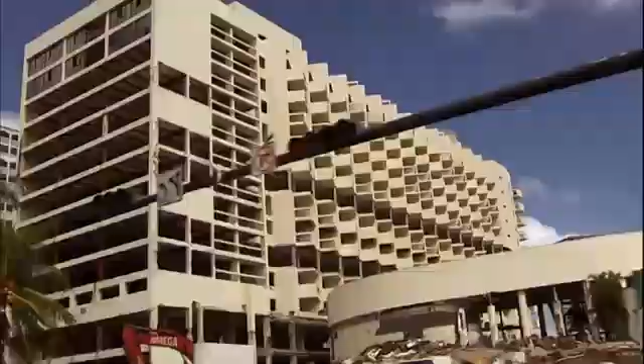One of America's first luxury resorts must come down. Two massive towers wedged into a densely occupied and high-priced neighborhood. An exhausted team. A hazardous site. We gotta stay sharp. It's just an inherently dangerous place.

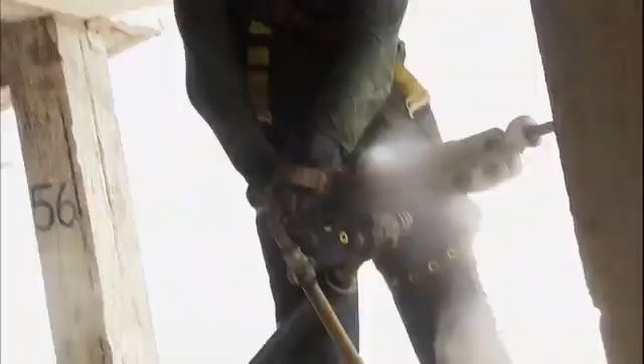A structure built to withstand hurricane forces. On a scale of difficulty, this would be a 12. Packed with enough explosives to obliterate it from the Miami Beach skyline. Will it drop into the fall zone? Or send debris raining down on its million-dollar neighbors? Fire.

Florida. Miami Beach. A haven for the rich and famous. Where big bling walks and big money talks. It's 2 minutes to implosion, and Controlled Demolition Incorporated is ready to take down these: the Sheraton Bal Harbour Beach Resorts Hotel Tower and Parking Complex. The hotel stands on the north end of the property, and a parking complex sits to the south.

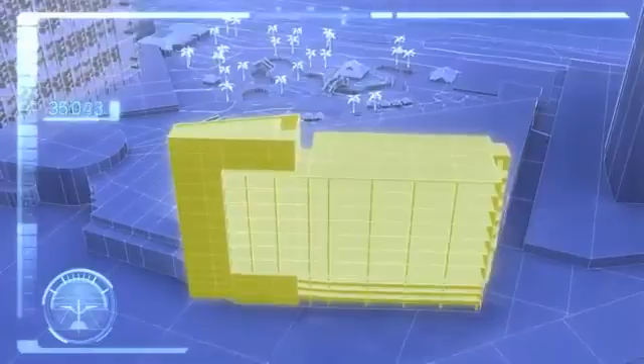Is Josh with you, or are you separate? Together, we've got the whole parking lot locked down. Thank you. The team struggles with test blasts. 5 minutes. You got about 10 seconds. That's a problem. That's a big problem. This is bad. They load the buildings with over 230 kilos of blasting power. Only 5.5 meters away from an adjacent high-rise.

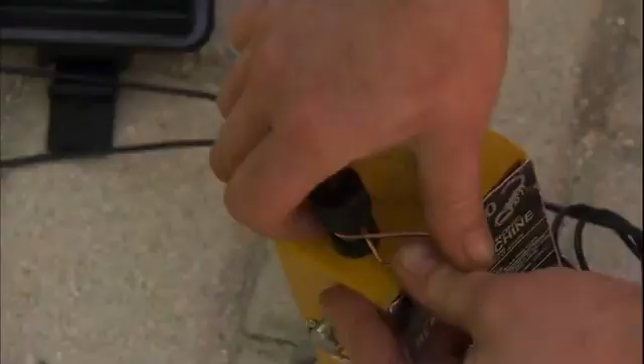Jim Santoro, Stacy is hooked up and ready. Last-minute instructions. After you hear my detonation, count to 3 and do yours. Final check-ins. Stacy's in the red. Mark is in the red. 5, 4, 3, 2, 1, fire.

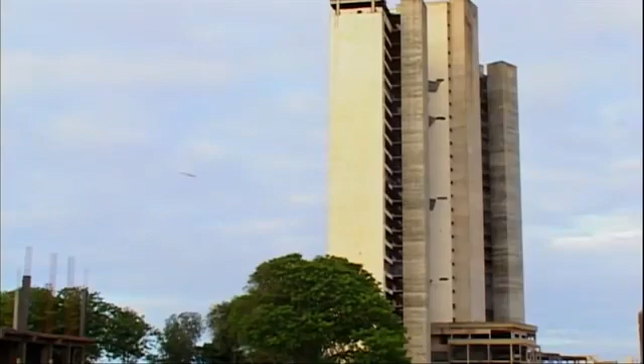Controlled Demolition Incorporated from Phoenix, Maryland, is a veteran family demolition team. They implode outdated resort complexes on almost every continent. As soon as we're clear, we're going to go. From the Four Seasons Hotel in Mozambique to the Hilton Hotel in Beirut. They take on some of demolition's biggest challenges.

With anything, you have to respect it. Riding a horse is inherently dangerous if you don't know what you're doing. Same with explosives. If you don't respect it, you get into trouble. Now, the team flies straight in from another job, a legendary Las Vegas hotel casino.

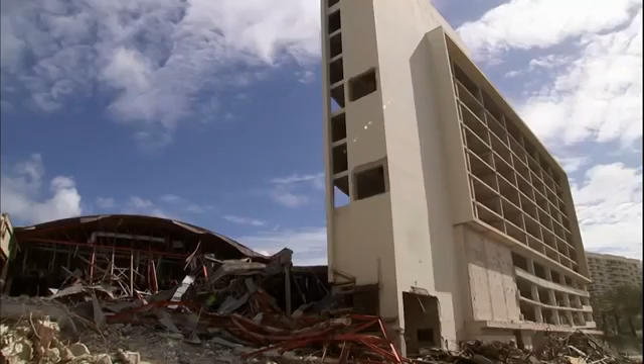They face another 12-hour day, their 21st in a row. A close-knit family. They have a lot on their plates, with no end in sight. I will be very happy when these buildings are on the ground. 2 shots in 1 week, it's a lot of work. I'm tired. The team must clear the site for a new billion-dollar condo complex.

They will implode 2 separate structures at the same time. A 12-story concrete parking complex and a 17-story hotel tower. People and properties hem in the aging resort complex. The 20-story Balmoral condominium complex rises above the hotel tower to the north. To the south, beside the Sheraton's defunct parking complex, sits the swank Majestic condominiums.

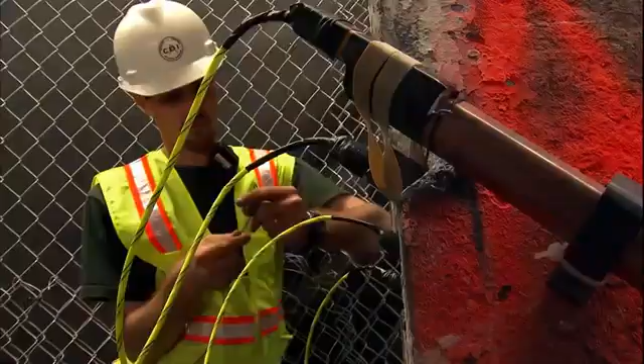Busy highways and the ritzy Bal Harbour shops line the western border. On the east side of the Sheraton Resort property, vacationers and locals lounge on the waterfront's pristine beaches. The team can't just drop these structures. They must contain every gram of firepower to guarantee the buildings topple safely into predetermined areas. One fall zone is at the foot of the hotel tower. The second is at the foot of the parking complex. The last fall zone sits at the center of the property.

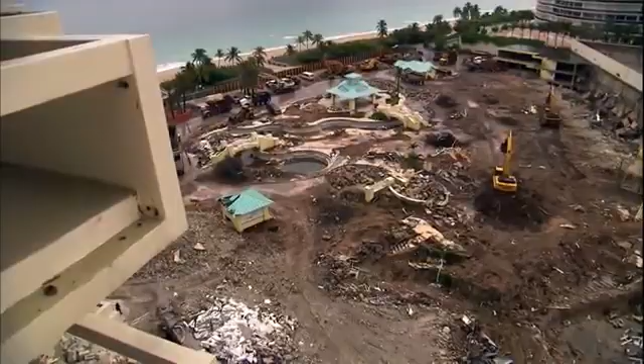The explosive plan looks like this. Explosives will detonate in the hotel tower's most inflexible area, its front legs. As the legs collapse, the front of the building drops. Milliseconds later, a series of explosions sweep to the back. With nothing supporting its weight, the tower tumbles toward the center of the property.

But there is a major obstacle. The once glamorous lobby of the old resort stands in the hotel tower's fall zone. When the tower crashes down, the lobby could launch concrete and broken steel over the safety perimeter, damaging property or injuring people. It isn't practical to implode the lobby.

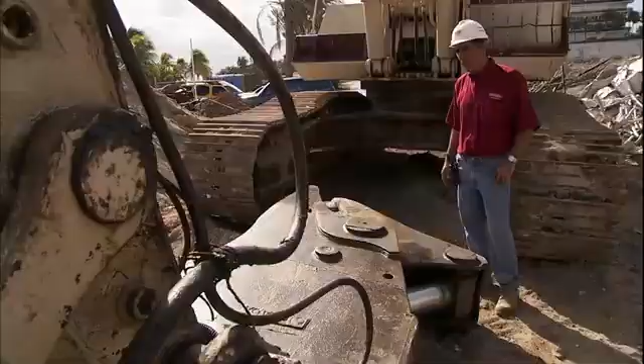So the crew chooses this to solve the dilemma: the Komatsu 400, with a specialized mechanical claw. This is an Okada 90 concrete processor with a rebar cutter in the back. It has approximately 5,000 pounds of pressure. It pretty much would crush a car, smash it down to a pancake. This mechanical monster has over 12 meters of reach.

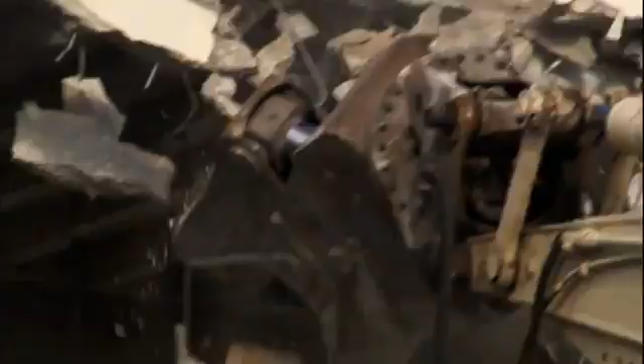The Komatsu tears free the lobby's last support, and the structure collapses under its own weight. 6 excavators attack the rubble the Komatsu leaves behind. This rubble is precious. The crew recycles over 53,000 cubic meters of concrete.

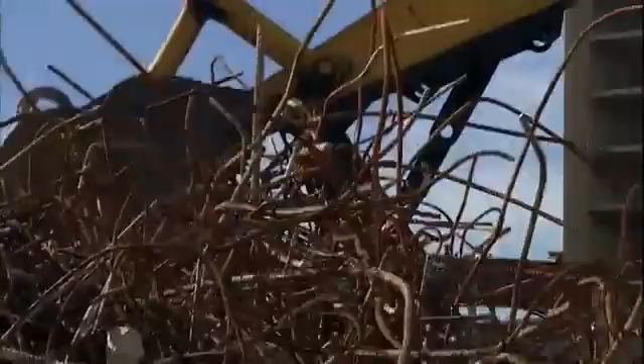Excavators reclaim a jagged mass of broken steel. The price of building materials is at an all-time high. Recycling them is a billion-dollar business. Crews quickly clear the area at the base of the hotel tower.

Inside the tower, the explosives team gets a look at what they're up against. Mark Loizeaux is the demolition designer. He tours the building for the first time. How did they build this here? Is this code? Oh, I would hate to sit here and comment on that. Once you cover it up with a little sheetrock, I guess nobody knows, huh? That becomes code, right? He has 10 days to finalize his plan to implode the structures.

Touring the floors gutted by the local contractor, Mark finds a problem. A steel I-beam spans a section of the building. It's 22.8 meters long and nearly 2 meters high. This is bad. I can't do anything with this. Florida is hurricane country. Monsters like Andrew, Katrina, and Wilma pound her shores.

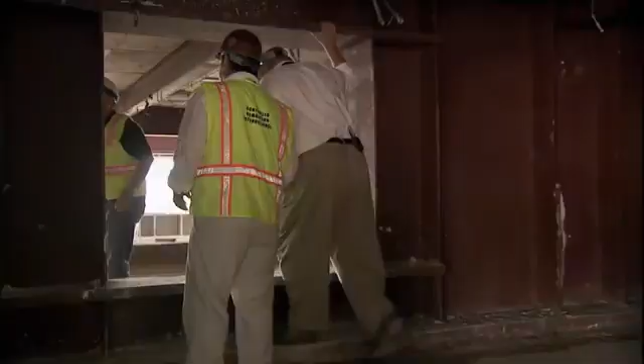Architects designed the hotel tower to withstand high winds by buttressing her walls with the huge I-beam. That's the biggest steel beam I've ever seen other than the World Trade Center. In a building. That's a big beam. Unlike concrete, steel has some flexibility to allow the building to sway slightly in hurricane-force winds. I-beams this big are normally reserved for skyscrapers. This I-beam holds the upper floors together. I can't do anything with this. Knock his feet out from underneath it.

If Mark executes his original strategy, here's what could happen. As the front legs of the hotel tower collapse, the I-beam will hold steady, pulling the building away from the fall zone, toward the Balmoral condos, crushing the balconies and front rooms of the first 5 floors. I can't work at this level. This controls the whole end of the building. Mark has a problem. His plan for the hotel tower is obsolete. How will he devise and implement a new one in only 10 days?

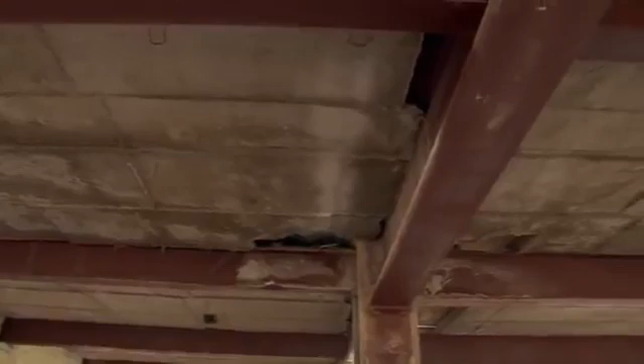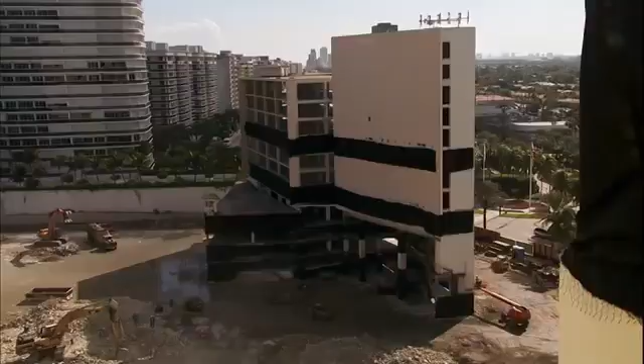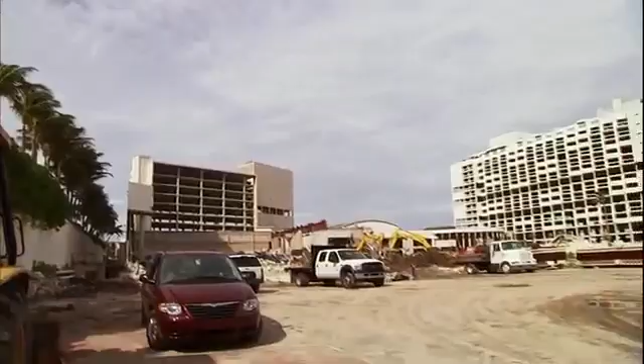The neighbors don't want dust coating their condos or their lungs. They threaten a lawsuit to prevent the implosion. If they succeed, the town could shut down Mark's entire operation. The debris makes it hard to imagine the grandeur of this hotel when it opened in 1956. Built by Morris Lapidus and originally dubbed the Americana, it was one of the first of its kind, an all-inclusive resort hotel. 645 rooms housed post-war tourists eager for swank escapes.

In 1963, John F. Kennedy stayed here, giving a speech only 4 days before his assassination. The President of the United States. Frank Sinatra and his Rat Pack held court in the hotel's infamous Carnival Supper Club. The hotel was more than a place to stay. It was the destination. A trendy holiday hotspot whose lobby permanently displayed live alligators. Lapidus basically reinvented the modern resort hotel, and that puts this hotel in its own class. The glamour has faded, and tourists have been replaced by demolition teams.

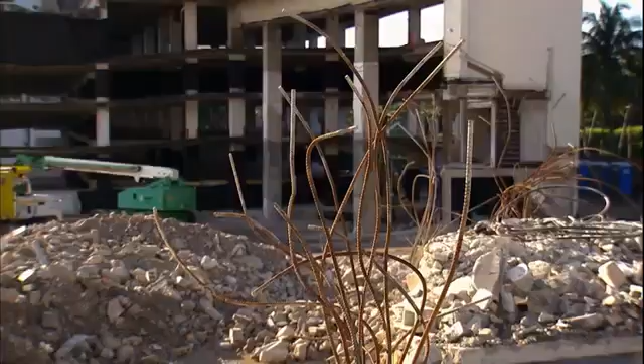Mark struggles with the I-beam in the hotel tower, but he must also plan the implosion of the parking complex. This is a well-built structure. It's very, very well reinforced. It's very well executed. I respect it. Now that respect gives me pause. This former 12-story parking complex with hotel rooms on the top levels has 3 features. The south-facing stairwell, the parking area composed of horizontal concrete waffle slabs, and an elevator shaft built high and narrow.

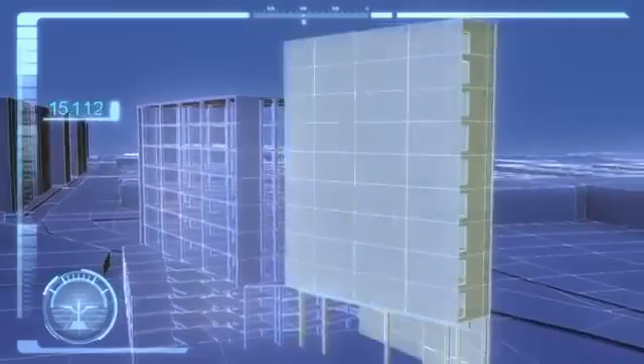Mark wants the waffle slabs, made of hollow concrete and steel ribbing, to slide forward into the fall zone. But he knows that each section will impact the others during the implosion. If he's not careful, the elevator shaft could fall against the waffle slab, forcing it toward the stairwell and sending the stairwell reeling backwards. Either that back wall is ready to come, or it's going to fight. If it fights, it could go backward. If it goes backward, it's going across the adjacent parking garage about 12 feet away. To prevent property damage to the neighbors, Mark decides to treat the building like it is 3 independent pieces during the implosion sequence.

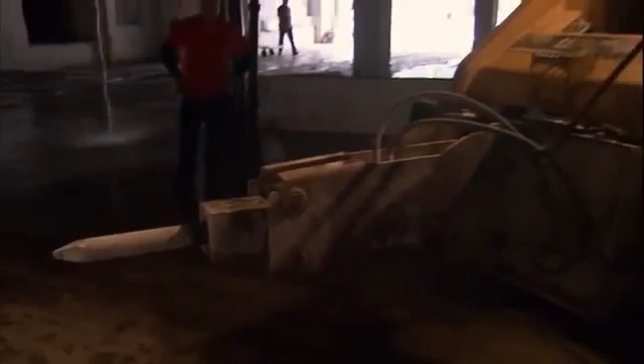We know pretty much what the waffle slab wants to do, and we will be weakening the structure in a fashion that creates flexibility during the implosion sequence where none exists now. Problem solved? Not quite. Now, Mark must determine the explosive power he'll need to make the structures fall properly. He investigates the support columns in the parking complex.

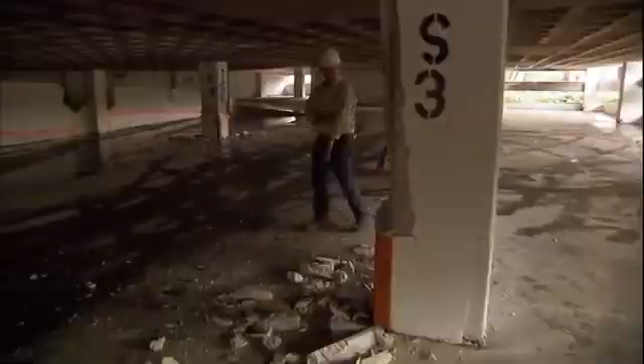A skid steer outfitted with a pneumatic hammer breaks away the concrete. Mark doesn't like the rebar he sees. It's unusually placed. He pulls the machine to the other side for more information. I hate this rebar configuration. It's just twice as much work. The column has rebar on only 2 of its sides. All right. Now my problem is the explosive wants to blow out in the direction of least resistance to 2 sides.

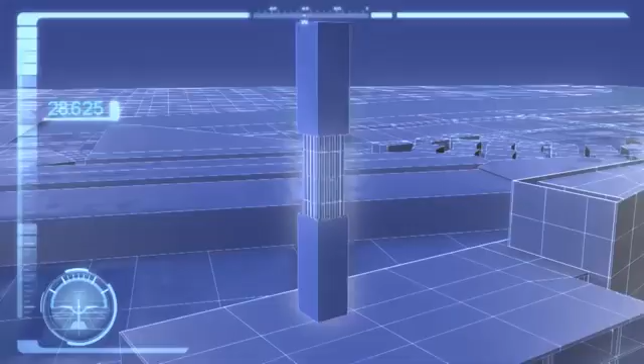Normally, builders position rebar at regular intervals to create a steel cage. Workers place these cages inside the columns and fill them with poured concrete. This gives the column added strength. Mark wants to make the rebar fail by bowing it outwards. They place explosives in the middle, and it bows the rebar out on all sides.

Mark's problem is that the parking complex columns have rebar on only two sides. When the dynamite detonates, it will escape through the column's weak sides. It won't bend the rebar, and the building won't separate or fall properly. In the demolition business, they call it a sit-down.

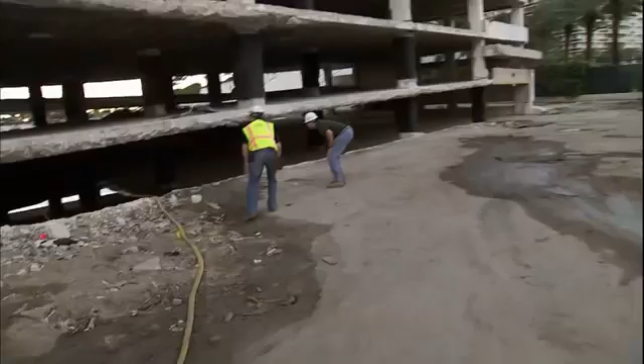In 2006, another demolition team miscalculates. They do not place enough explosives into the support legs of a former NHL arena in Winnipeg, Canada. The team triggers the explosives, but the rebar does not fail. The arena remains standing. Instead of flexing and falling, it sits straight down onto its four corners. It is critical that Mark determines the combination of explosives to overcome the two-sided rebar dilemma. He decides to do a test shot.

It's bright and early Wednesday morning, just 4 days before the implosion. Mark places explosives in 4 columns, 2 in the parking complex and 2 in the hotel tower. What I'm doing now is adjusting exactly where the explosives go in the column. This hole is drilled a little deeper than it ought to be. That's a policy we have. It's better to drill it just a touch deeper. You can always stem it up.

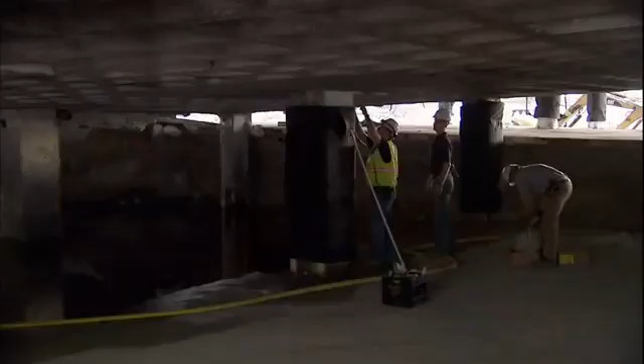This is a primer. It's a half of a stick, which makes it a quarter of a pound of explosives. I might need some more sand. He sets them at different depths inside the columns and in different strengths to monitor the effects. It's rush hour in Bal Harbour. I just gotta check. Everybody's upset. And move my truck. But crews are still prepping the columns for the test.

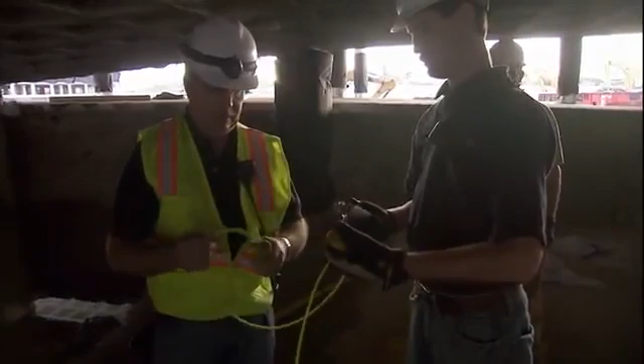The purpose of the test shot is to determine exactly how much explosives we need. And it's actually preferential to undershoot a test shot just a little bit if you can. If you overshoot it, you don't learn too much. If Mark overshoots the test blast, it'll destroy the clues he needs to bring the building down.

A test blast is probably the most dangerous thing we do because people aren't ready for it. Everybody expects a main implosion, but the test blast is a little more difficult than that. It's also the time where we know the least about the explosives that we need. That's why we do a test. So it's an important thing, but it kind of upsets everybody early in the morning.

I'll take it. Even though it's only a few sticks of dynamite, the crew locks down the entire site. We're still looking at about 5 minutes, just waiting to shut everything down. Police halt traffic in both directions. All right, Mark, we got a real big backup coming southbound already, so we're gonna have to expedite this a little bit.

Mark will initiate the first shots in the parking complex. Jesse will trigger the shots in the hotel tower. Jesse, the warm-up on your machine is about 13 seconds. We'll warm up together. After you hear mine, count to 3, and then push yours.

Ray, Jesse, and I are both hooked up. We're ready to start warming up. With seconds to go, the crew spots a pedestrian on the wrong side of the security perimeter. You got those people, Jim? They're the last people. To your left, Jim. Coming up the street. Got him. Okay, Jim, we're just gonna hold them right there, okay? The site is secured. Okay, Mark, warm them up.

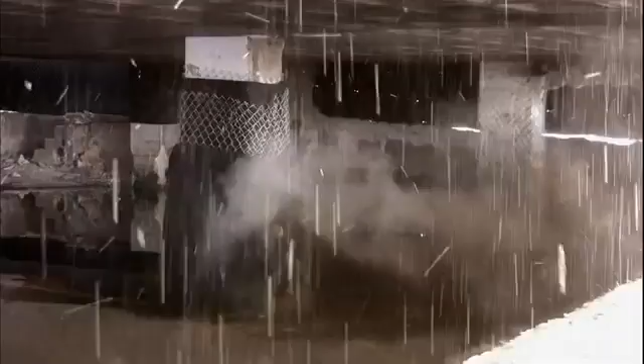Okay, Jesse, warm up. Jesse, tell me when you're in the red. Jesse is in the red. Here we go. 5, 4, 3, 2, 1. Fire. 1, fire. You're all set. We're all clear. Okay, Ray, all clear, release traffic. Already done.

I do not want anyone to cut down any cover. I want to see what it looks like after the shot before anybody touches it, please. Mark moves in to check one of the parking complex columns. It has been a small but significant blast. He's not happy with what he sees. Yeah, that's a problem. That's a big problem. Okay to come in or what? Yeah, go ahead. Mark's placement of the explosives is a failure.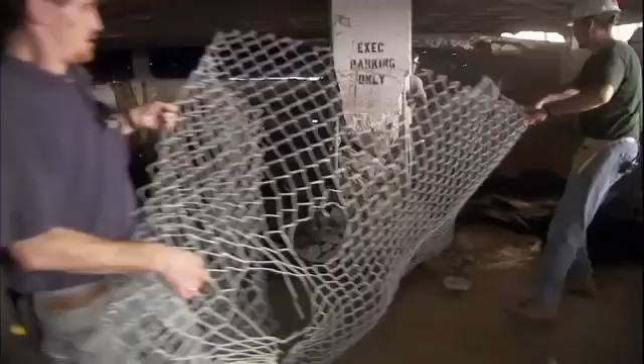Look how brittle this is. The test shot shatters the concrete and leaves the rebar virtually untouched. It's just going to blow out either side and not bend the rebar. So I've really got a problem. In this case, I wish I had more rebar rather than this configuration, but that's a two coffee decision. So we're going to go look at the other building and see what we find.

Mark moves over to the hotel tower. He placed the explosives at the rear of the hotel tower, in the columns nearest the Balmoral property, a place he has dubbed the hinge row. If all goes well, this row of columns will only partially shatter during the implosion sequence. It should look like this.

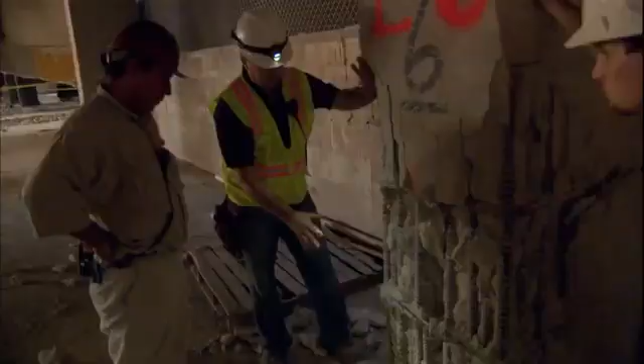The explosives at the front of the hotel detonate, sending the face of the tower falling forward. The hinge row detonates. The explosives weaken the wall, but it remains intact. It is dragged over, preventing debris from dropping towards the Balmoral condominiums. At the last moment, the hinge wall is torn free from its base by the weight of the wall as it falls. For a few critical moments, the hinge row bears the weight of the back half of the hotel tower. Mark needs a precise amount of dynamite, just enough to bend the hinge row columns without completely destroying them.

This is a half a stick of explosives here. The concrete is well fractured on the inside. It's spalled off. But you notice nothing is displaced. Nothing is displaced at all. Both test shots provide critical information. Mark now knows he'll need to use more dynamite if he's going to make the hinge row flex.

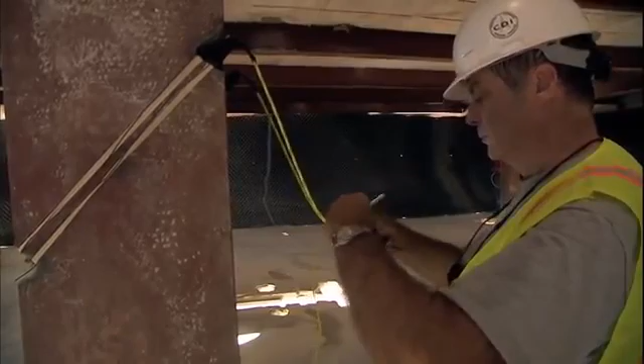Within the hotel tower, Mark's brother Doug works on another piece of the implosion plan puzzle, the I-beam. The hotel tower's 6th floor is a lattice of steel beams with a massive I-beam at its center. Doug needs to find its weakness. If you eliminate this column, essentially you're making a cantilever out of this beam. When the support columns are removed on one side, the I-beam becomes a lever on which the upper floors push down. The I-beam will pry the opposite side of the tower up and away from the Balmoral condos.

The real key is the timing. How long do you wait to get the maximum pull from it on the rest of the building? You will see these walls actually jump in because we're using the weight, we're using the construction to control the fall of the building. It's cool. You'll like it. Doug's plan requires that the team start loading the hotel tower with explosives.

But before they can start, Mark confronts a bureaucratic hurdle. We cannot load. Hopefully they won't get a restraining order. The neighbors file a complaint with City Council. The town of Bal Harbour refuses to issue the implosion permit pending further investigation. Mark must decide. Should he wait to see if a stop work order is issued or load the buildings with explosives?

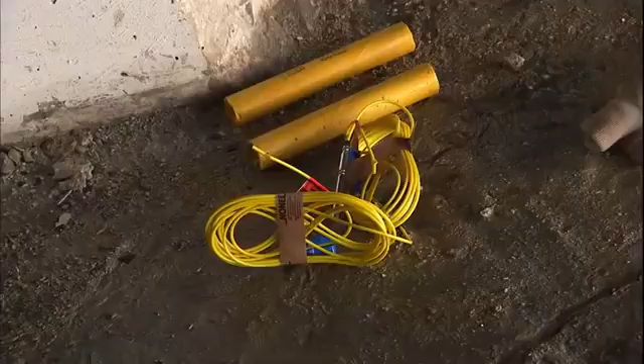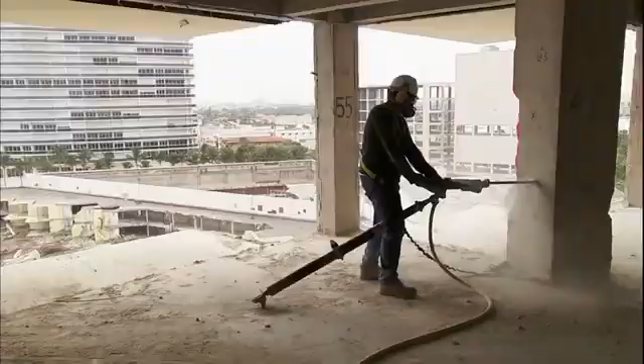Mark makes the decision to push things forward. I'm here to take out a building, so we're loading the building. Swing it very, very slowly here. The crew drills holes and loads dynamite to attack concrete and rebar. What surprises me is the hotel tower also contains steel columns. Weakening them requires something more powerful than dynamite. If we taped a stick of dynamite to this column, all the energy would go away from it. You'd knock the rust off of it.

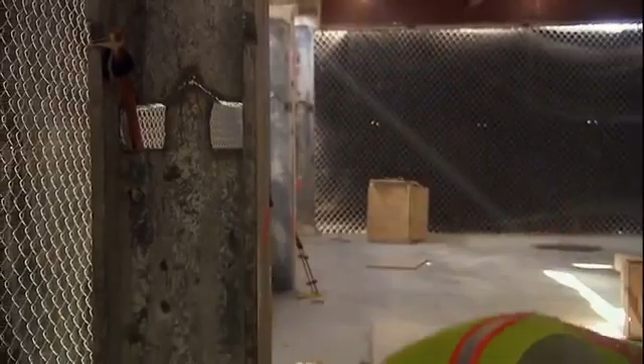Doug uses linear shaped charges to combat the steel. Due to the conical shape of this, rather than detonating to the least resistance, it directionalizes the charge. What happens is when this goes off, two arcs of energy come together at an optimum standoff distance, and it will cut the steel as clean as a knife.

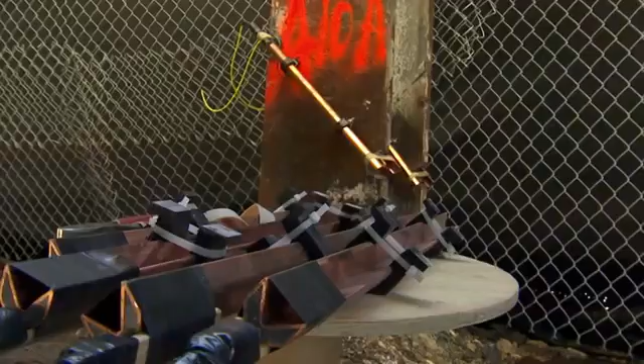These will be placed on the steel, something like this. So what happens is when it's detonated, this will cut completely through. Warheads, armor-piercing shells, and improvised explosive devices use the same principle. The team straps 4 shaped charges on either side of the steel beam, 2 at the top and 2 at the bottom. The charges will detonate simultaneously, removing a large section of the column.

As the team begins to install the shaped charges, Doug and Mark receive an emergency call.

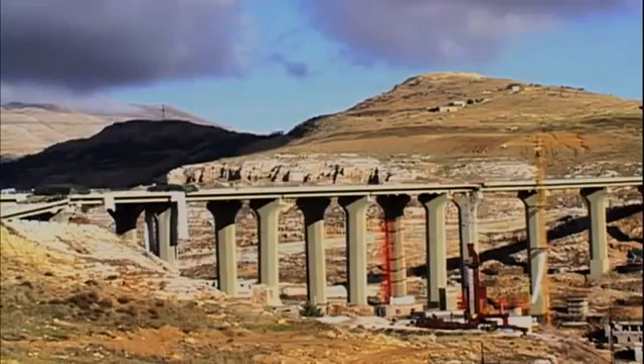CDI doesn't just bring down buildings. They perform some of the most dangerous industrial demolitions on the planet. In 2006, Israeli jets bombed Madirej Bridge in Lebanon. With one span of the bridge hanging dangerously, CDI came in to drop it.

At 366 meters, the Omega Tower in Argentina was the world's tallest radio tower. In 1998, CDI brought it down, the tallest structure ever felled by explosives.

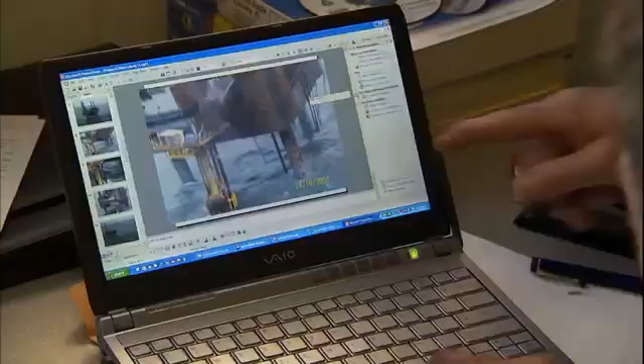The nationalized oil company in Mexico. Apparently yesterday they had an oil platform knocked over by the wind, and it floated into another platform, colliding with it, snapped off the head of an oil well, and they've got a pretty big spill, which is an environmental concern, and they want us to come down immediately. Doug has to leave early the next morning to deal with the hulking rig.

Ray Zakowski takes over the tricky shaped charge installation. What we're doing right now is putting our kicker charge on the steel columns. The shape charges will cut the column high and low, but we also need to move the column. The column needs to get out of the way. So we got to actually just give it a little thunk. Here we're using just a half a stick. It's all we needed to displace the column so the column will fail.

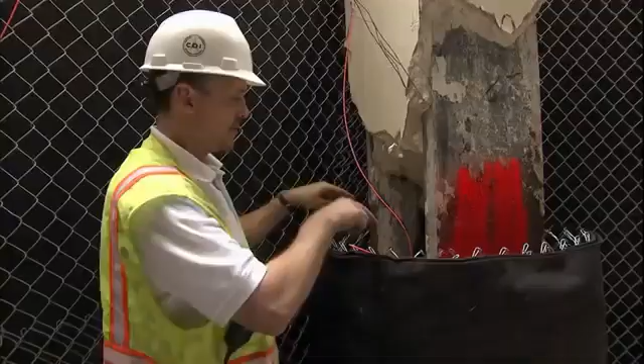The team loads 3 sets of explosives onto each steel column, 2 sets of shape charges for the top and bottom, and 1 stick of dynamite at the center. The shape charges detonate at a higher velocity than the dynamite. So this is slow enough, it gives me time to cut the steel, then the dynamite detonates, steel is cut and just gives a little pow, just enough to knock it out of the way.

When the shaped charges detonate simultaneously, they cut the steel beam, high and low. The stick of dynamite, or kicker, explodes a fraction of a second later. The force of the blast displaces the beam left between the cuts. The column has nothing to support it. Gravity brings it down. Even with careful planning, experts find shape charges difficult to manage, sometimes with fatal consequences.

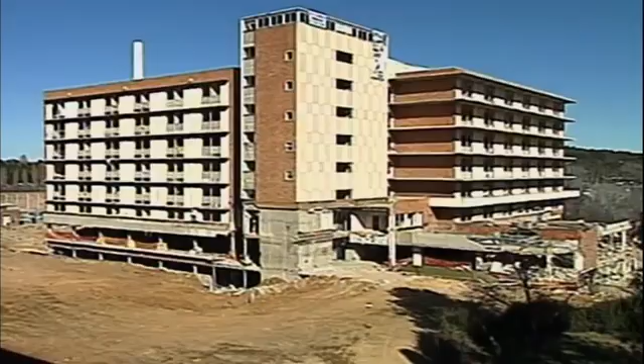Canberra, Australia, 1997. A crowd gathers. An exclusion zone was placed around the area outside. Another demolition team has loaded an outdated hospital with explosives. From the front, the implosion looks fine. On the water side, it's a different story. A steel girder, loaded with shaped charges, launches steel shrapnel 430 meters.

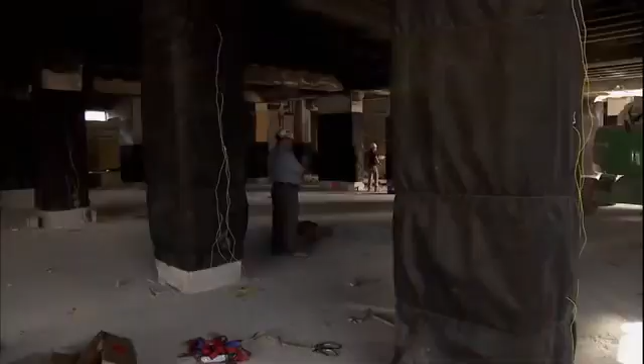It's a copper-coated explosive. The copper gets forced through the steel, but the backing of the charge gets projected at about 25,000 feet per second. So unless we put all this protection up, we could send copper as far as 2,000 feet. The team uses a custom-made solution to protect the public.

In order to stop that, we put a plywood box. Inside the plywood box is 3 pieces of conveyor belting. Here I actually put 5 because it's such a high-power charge.

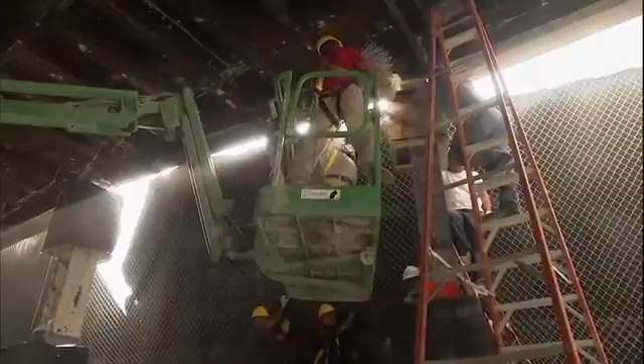The fence and the fabric's main goal is to stop the flying plywood. The plywood's main goal is to hold the belting. Actually, the copper will go through the first couple layers of belting and then it stops. It's a bulletproof vest for demolition. Crews work all out to secure the boxes. There are only 36 hours till shot day, and over 100 deadly charges to be contained.

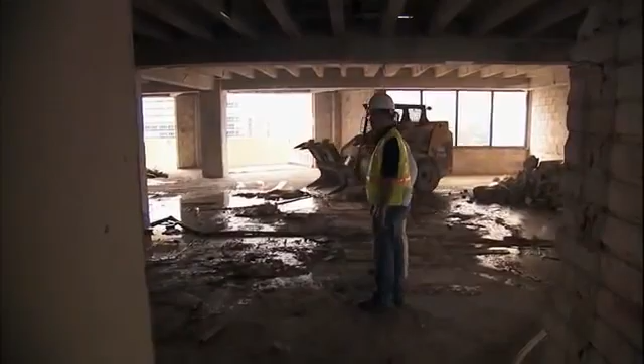While Ray boxes charges on the ground floor of the hotel tower, Mark decides on the final delay pattern from the 7th floor. This wall borders on the narrow alley separating the Sheraton Resort property from the Balmoral condominiums. Mark expects the I-beam will pull the wall over away from the Balmoral during the implosion. But he needs everything to come over in one piece. If it shatters, debris could rain down on the tennis courts or the parking complex below.

Install a cable for Harry tomorrow. All right. Even worse, it could launch shards of steel or chunks of concrete into the occupied condominiums next door. Mark decides on some extra security. The team installs 15,000 kilogram tensile cable to ensure the wall comes over. You can get it piano wire tight. You can literally make them hum.

Crews punch cables through the floors and wrap them around the concrete slabs below. They tether the cables to the elevator shaft that borders the alley. A cord? What do you have? They angle the cables to increase the tension and speed the fall.

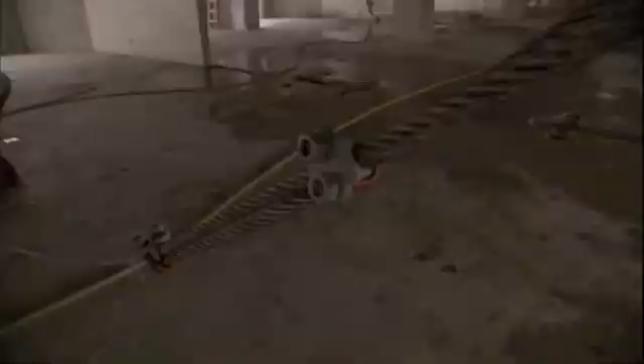If I didn't install a cable on an angle, I would have to wait for the beam over my head to come down on an angle somewhere between 30 and 40 degrees before I'd start to get a pull on the back wall, the north side of the structure, that needs to be pulled away from the Balmoral condos on the right. So this is probably the cheapest insurance we have toward walking the building away from the adjacent property safely.

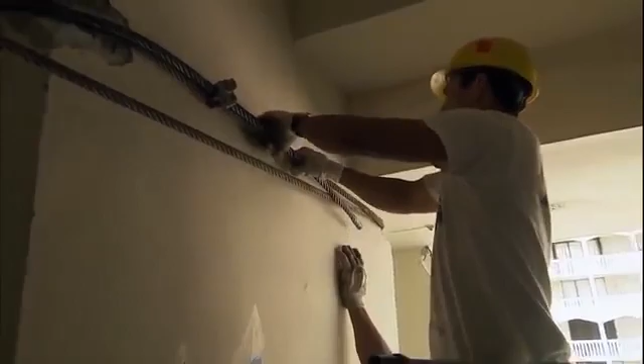These clamps bind the cables together. The clamps we use are U.S. clamps. These are called Crosby clips. They are probably the best clamps that money can buy because the weak link in any chain or any cabling operation is what's going to yield first. The clamps are vulnerable as they briefly support the immense weight of the hotel tower's rear wall. Clamps are very critical, and how they're installed on the cable is critical. Careful attention is required as the team installs 350 clamps and over 1 kilometer of cable.

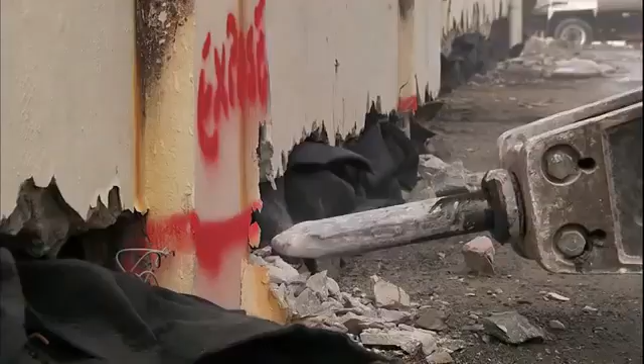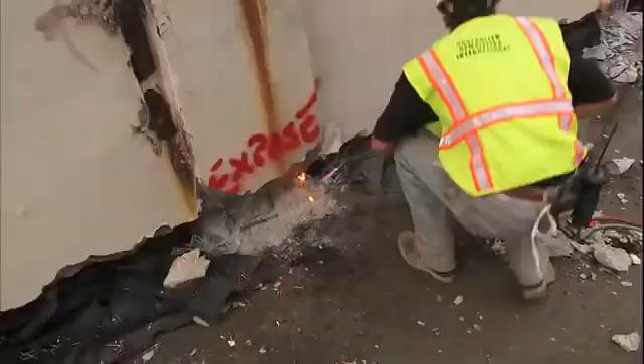Mark's plan to drop the hotel tower is nearly complete. The motion created by the I-beam and the cabling should drag the wall over, but he has one last preparation. On the ground floor, this specially outfitted skid steer hammers out concrete along the foundation beside the hinge row. We've released the building across the back and exposed all the rebar so that it can rotate freely and really keep the motion going. Literally, the building can pick up and rotate, and it'll rotate on the center bar. Every strength of this hurricane-proof hotel tower has been subverted.

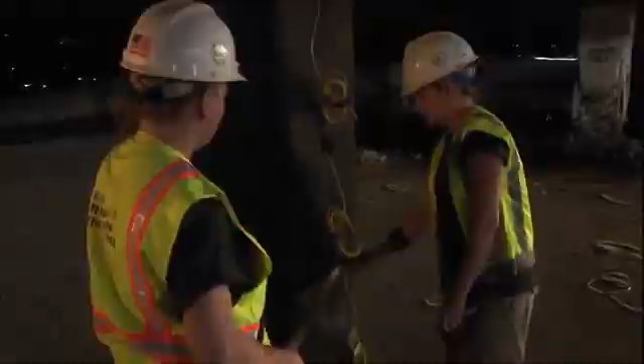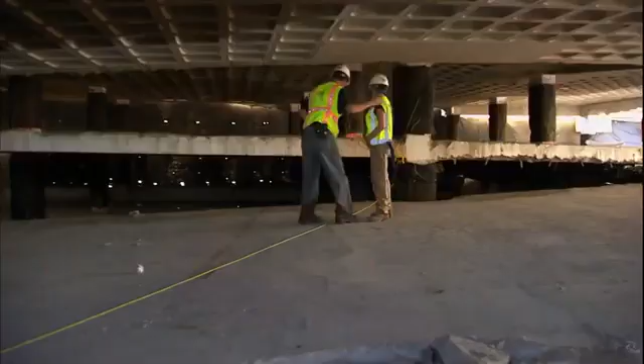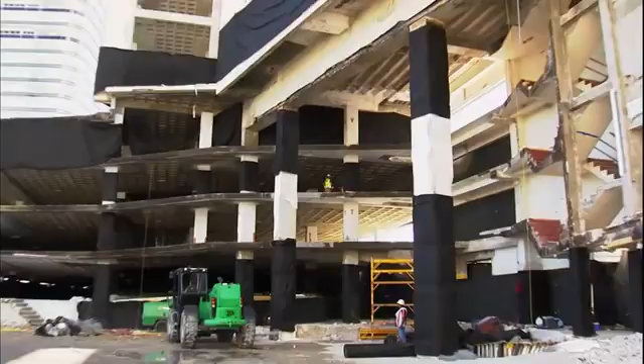Normally, Stacy connects the explosives from floor to floor in numerical order. She finds this parking complex a challenge because there are no divisions between levels. It's simply one long sloping ramp from the ground to the 5th floor, making it difficult for the loading team to stay oriented. So this is the 8th slip. So let's go from here and I'll hop up and... it just jogs around so much, it's confusing. Their location is critical. Stacy and Devin must get the timing and connection straight to ensure that the entire parking complex drops into the fall zone.

Using a blueprint, they confirm the order of the explosives they're wiring. I think. So it goes 1, 2, 3, 4. I think that's that. Yeah, I don't know what else it could be. Yeah, it is. It is. Okay, ready? Yep. It's now less than 24 hours until shot day.

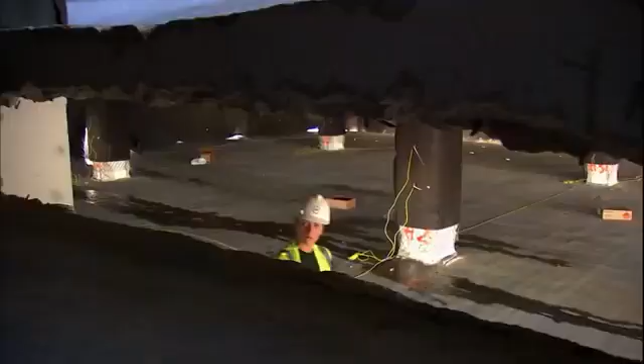The team has prepped and loaded the hotel and parking structures. Mark has finally secured an implosion permit from the city of Bal Harbour. They're all in place, they're wired together, they're putting in the final initiation sequence at this point. This building will be ready to shoot probably in about 4.5 hours. There's one catch. The neighbors are still threatening to file a legal injunction against the implosion.

Let me get my... Can it sit here? Sure. But every day that they delay the demolition of these structures increases the risk to the public at large. The towers are loaded and wired for implosion. A misstep from a trespasser could inadvertently detonate the explosives and bring the towers down without warning.

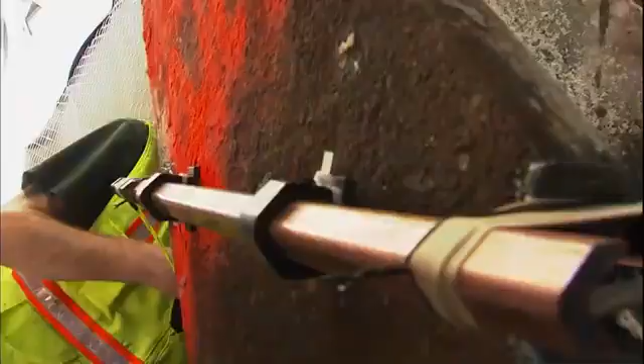Shot day. The two towers are chock full of explosives. Mark bets that the neighbors' legal challenges are too weak to delay the implosion. He bets right. The looming lawsuit passes. I think he probably had his lawyer tell him that he'd pretty much gone his route because there's been no mention today about a temporary restraining order or a hearing related to same.

So at this stage, we're loaded, we're wired, we're ready to go. We literally could hook things up and have it on the ground in 15 minutes. The team is ready to put weeks of prep behind them. This is what Mark's plan looks like. The resort's hotel tower on the north side of the property will come down first.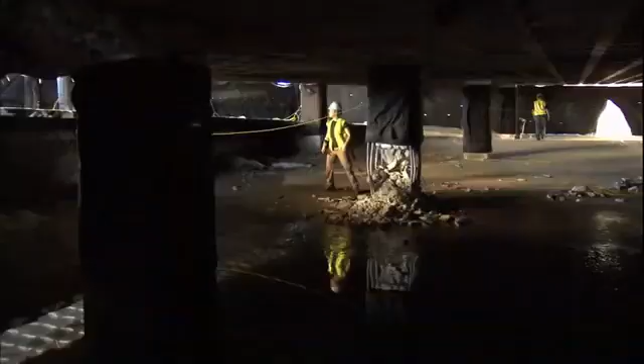First of all, we're double checking our own work, but we want to make sure maybe a homeless person hasn't wandered in the middle of the night, gotten past security somehow. Strange things happen. We've held up shots for a kitten in Washington, D.C., and we would do it again. We're here to take the buildings down, not end an innocent life of any description. They check the building carefully, making sure no one has breached the safety perimeter.

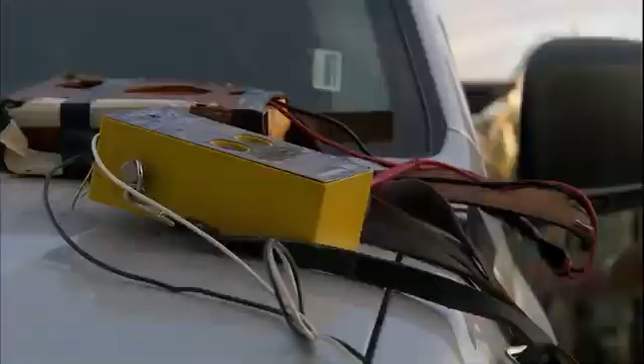The team is only minutes away from detonation when the police spot a serious problem. A bystander enters the exclusion zone. Kevin, class, can you see anybody? A neighbor is spotted on the balconies of the condos next door. Yeah. We got people on the balconies. I understand we have somebody on the 4th floor balcony right now.

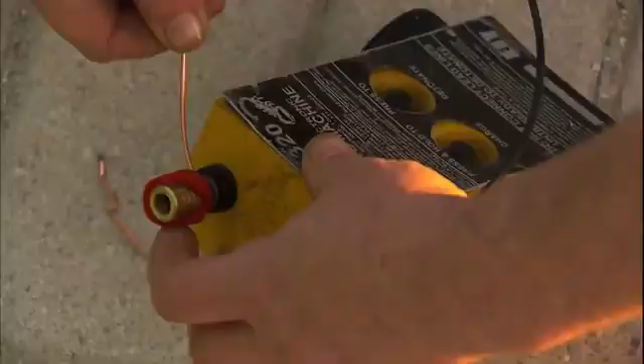As soon as we get them out of the way, we shall proceed. I'm passing that on to the police. The police secure the bystander inside the condo. The demolition team preps their initiating boxes.

Mark demonstrates the initiation sequence to a nervous local, the wife of the site manager. She'll help press the button. I have known your lesser two-thirds for so long, and I would appreciate your help, being as he represents the property owner here, okay. I'm going to hold down the charge button. Okay. And I'm going to put your thumb on the other button, and just to be sure, I'm going to put my thumb on top of yours. Okay, yeah, just to comply with the law. Hold your hand up.

She's steadier than you are. We're going to do this. Okay. You ready? All right.

It's 60 seconds to implosion. Mark starts the all clear. Jim, Mark Loazzo is clear. Jim Santoro, Stacy is hooked up and ready. Will the steel lattice slide off into the fall zone, or will it tumble back towards the Balmoral? The crew is seconds away from finding out.

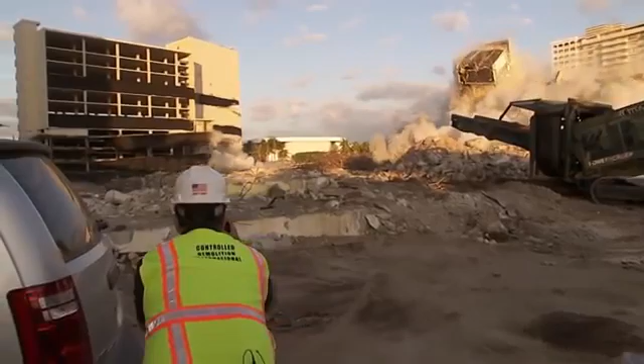We're gonna go real fast. Stacy and Devin are ready to initiate the implosion of the hotel tower. Stacy's in the red. Mark responds from his location near the parking complex. Mark is in the red. 5, 4, 3, 2, 1, fire. Stacy initiates the first round. With a little help, Mark initiates the second round. Good job.

The Sheraton blasts to bits. An impressive dust cloud drifts westward. Steel support columns of the hotel tower detonate first on the left-hand side of the ground floor. Milliseconds later, explosives detonate on the 5th floor. The massive I-beam helps push the face of the building over, dragging the rear wall with it.

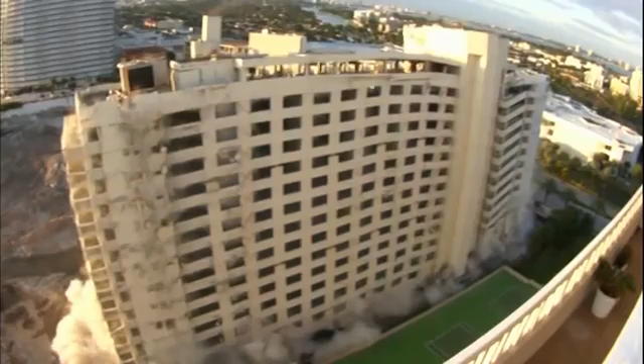On the 7th floor, the collapsing structure whips cables tight. At the back of the building, the hinge row flexes and releases, allowing the hotel tower to drop into the fall zone. This high-speed footage shows the steel blasting charges detonating on the ground, 3rd, 5th, and 8th floors.

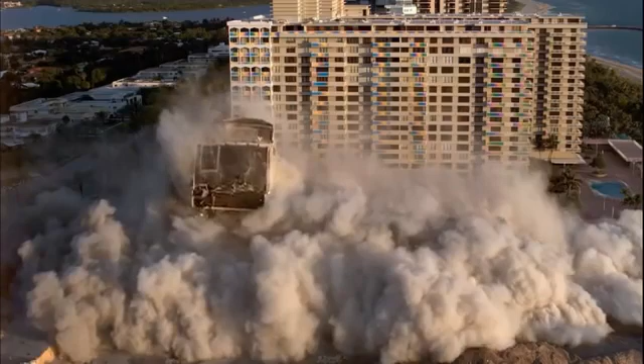As it falls, it reveals the Balmoral condos standing behind it. They appear to be undamaged. Seconds later, the section that holds the elevator shaft in the parking complex tower detonates. The columns that hold up the face of the parking complex detonate milliseconds later. Together, dozens of small detonations work to create a collapsing corner. As the corner buckles, the stairwell is pulled over.

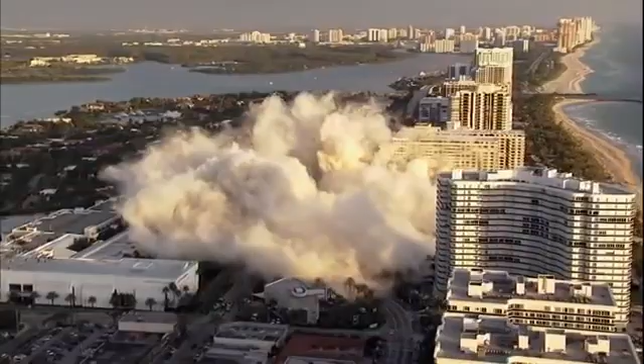The Sheraton is down in under 19 seconds. That was an excellent job. Guy Fawkes Day in Florida. It may be too soon to celebrate. Mark and the team move in to assess the success of the blowdown. During the implosion, winds coming off the water carry the dust cloud away from the condo towers. We got pretty heavily dusted here. The wind was blowing directly at the mall. The ritzy condo residents are spared. Cleanup crews quickly move to the shopping center.

One of the byproducts of demolition of any description is dust. And the advantage of implosion is you get the same amount of dust as you would with conventional demolition, but you get it all at one time. You get it at a time when you can prepare for it, you can turn off air intakes, protect adjacent properties against that dust. So all in all, I think we lucked out with the wind, and I think things will be back to normal pretty quickly here.

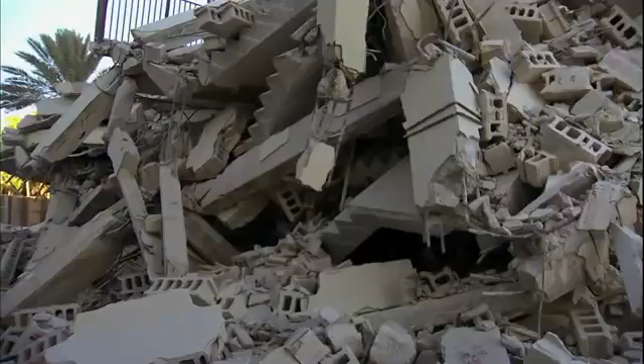Mark's benchmark for success is a pile of rubble less than 11 meters. Any higher, and excavators can't reach the debris to clear it. CDI, the south tower is perfect. We've got no kickback to speak of, nothing over the fence. Excavation crews will take 6 weeks to clear the site. As Mark circumnavigates the site, everything seems okay until he hits the Balmoral property line.

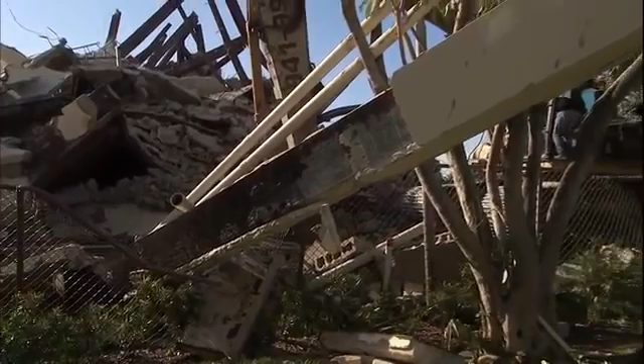You're going to keep working on it for me? Thank you. You've got a site fence company. Would you go ahead and replace this? Whoever you use that you trust to do really top quality work. Implosion debris damaged a section of the Balmoral's chain link fence. Their machine's going to go ahead and get this out. We'll have a fence company in here first thing tomorrow morning, put that fence back, and Balmoral will be 100% back where they belong. And sometime now, I got to go over and apologize to them for having to clean a new section of fence for us.

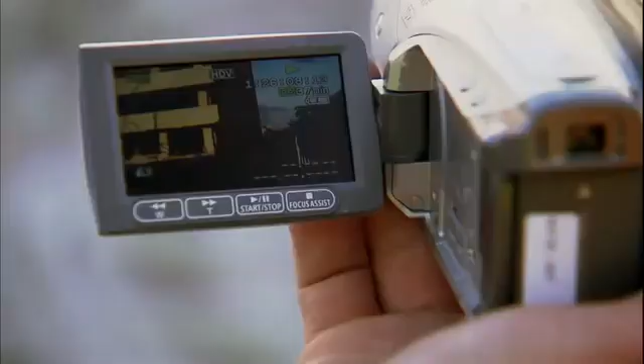With a moment to reflect, Mark reviews his handiwork. You see it come down, vertical failure, and then the differential velocity, and then the upper charges took it and just walked it over. You know, what amazes me is how far we got projection of debris to the south on this. During the day's implosion, Mark redefines how close is too close. And a new space in Miami's landscape emerges for future generations to build on. A new history begins today.